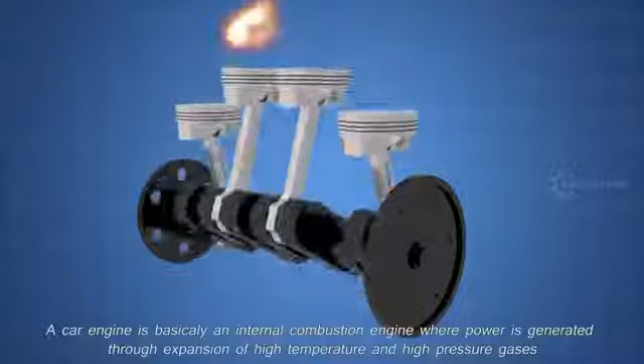Let's see how a car engine cooling system works. A car engine is basically an internal combustion engine where power is generated through expansion of high temperature and high pressure gases. A lot of heat is generated due to the combustion gas and the friction of mechanical parts. For sustained operation, this excess heat should be removed from the engine and kept at operating temperature.

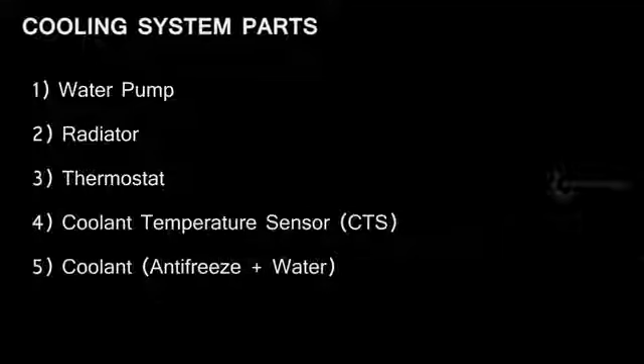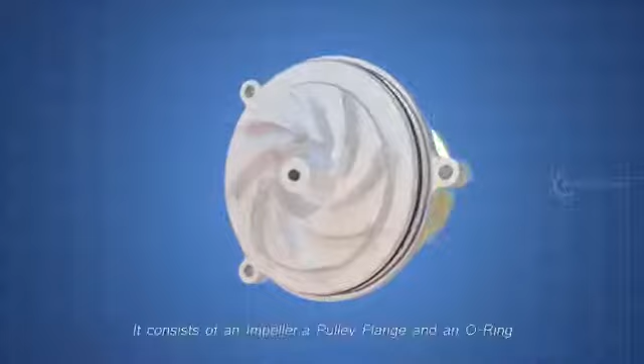Now let's see the parts involved in cooling the engine. The main parts for cooling the engine are water pump, radiator, thermostat, coolant temperature sensor, and coolant. First, the water pump. Water pump is the heart of the cooling system, which pumps the coolant. It consists of an impeller, a pulley flange, and an O-ring. The impeller is driven by the engine drive belt through a pulley.

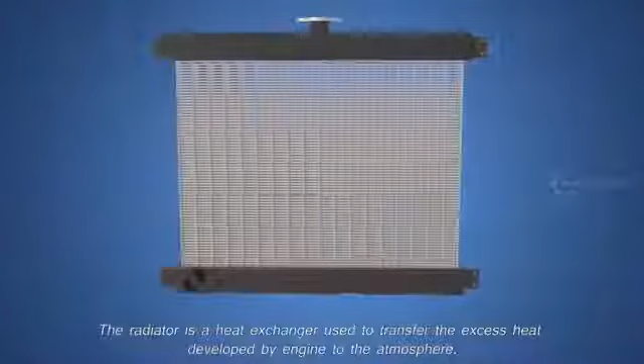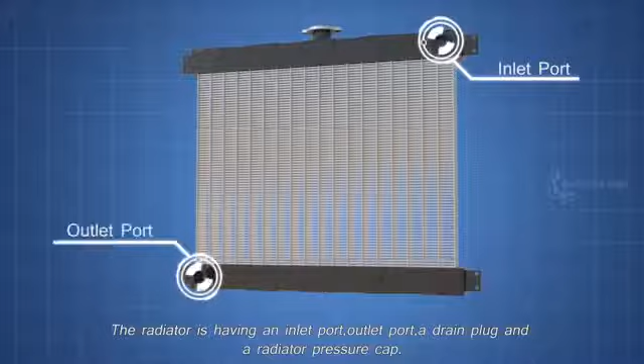Next, the radiator. The radiator is a heat exchanger used to transfer the excess heat developed by the engine to the atmosphere. The radiator has an inlet port, outlet port, a drain plug, and a radiator pressure cap. The radiator pressure cap plays a vital role in the cooling system, which will be explained later.

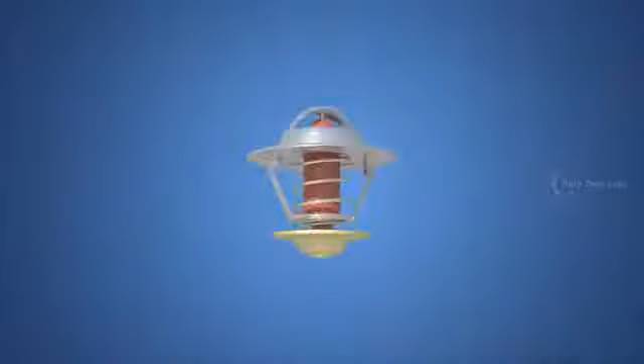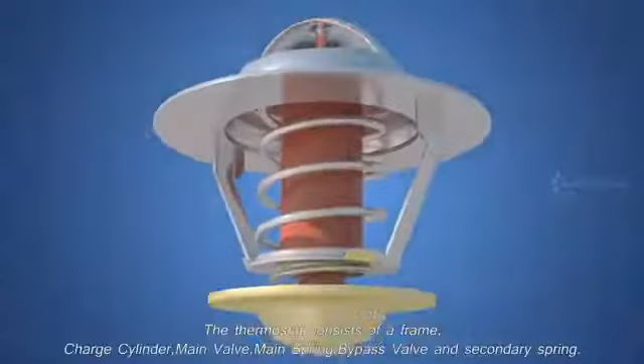Next, the thermostat. The thermostat is a valve which regulates the flow of the coolant and helps to maintain the proper operating temperature for the engine. The thermostat consists of a frame, charge cylinder, main valve, main spring, bypass valve, and secondary spring.

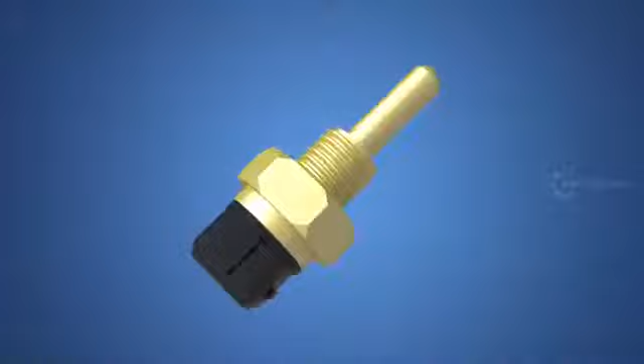Next, the coolant temperature sensor. The coolant temperature sensor is used to monitor the engine temperature. The ECU will use this data to manage fuel injection and ignition time. Some engines have more than one coolant temperature sensor. The data is also used to control the radiator fan and to update the temperature gauge on the driver console.

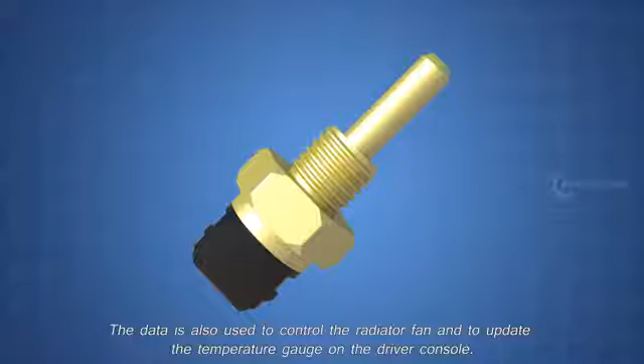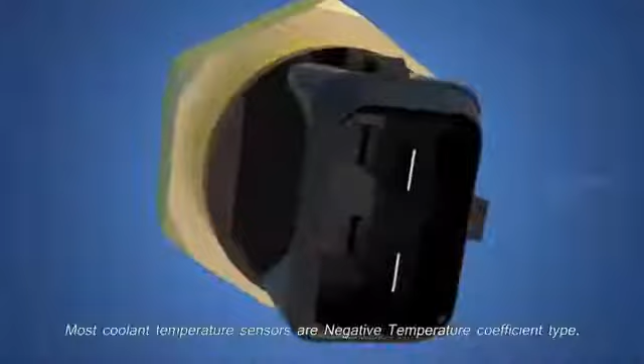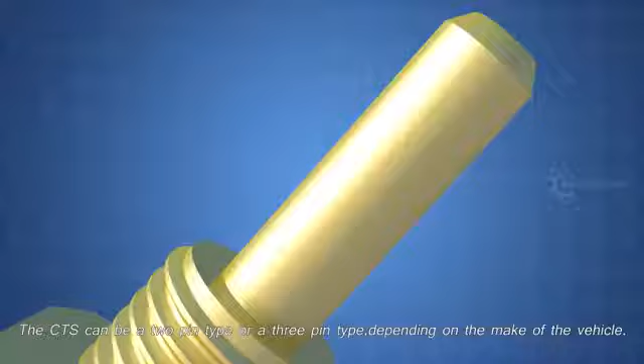The coolant temperature sensor consists of a sensing probe and an electrical connector. Most coolant temperature sensors are negative temperature coefficient type, which means as the temperature increases, the resistance will decrease. The CTS can be a 2-pin type or a 3-pin type, depending on the make of the vehicle. These are the main parts involved in an engine cooling system.

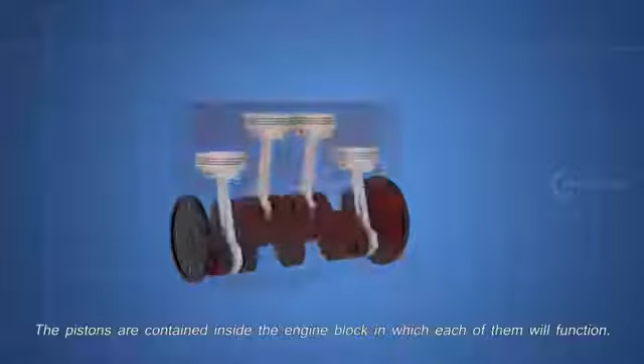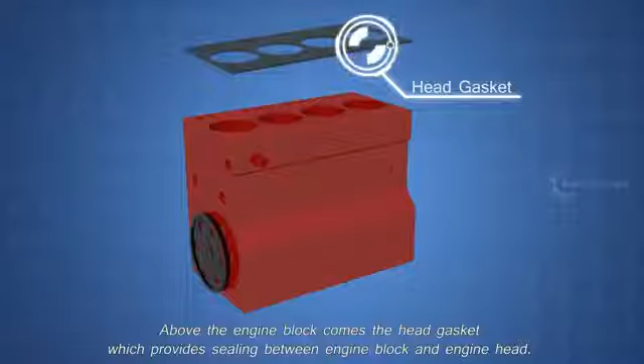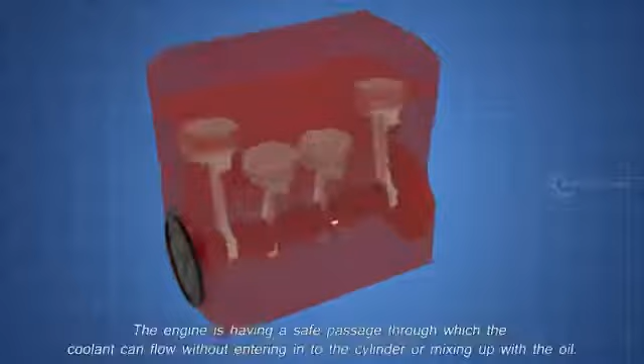Now, let's see how these parts work together. The pistons are contained inside the engine block, in which each of them will function. Above the engine block comes the head gasket, which provides sealing between engine block and engine head. It avoids compression leaks and oil or coolant leaks into the cylinders. Above that comes the engine head. The engine has a safe passage through which the coolant can flow without entering into the cylinder or mixing up with the oil. This passage is known as the water jacket.

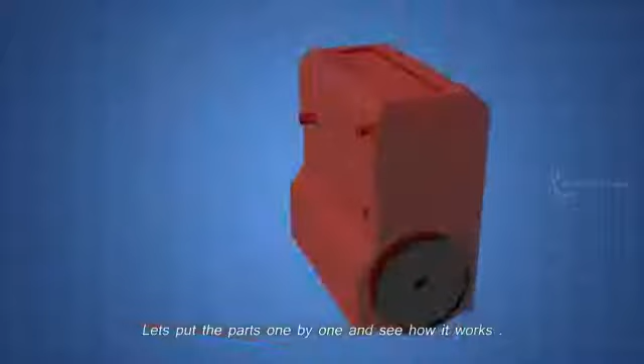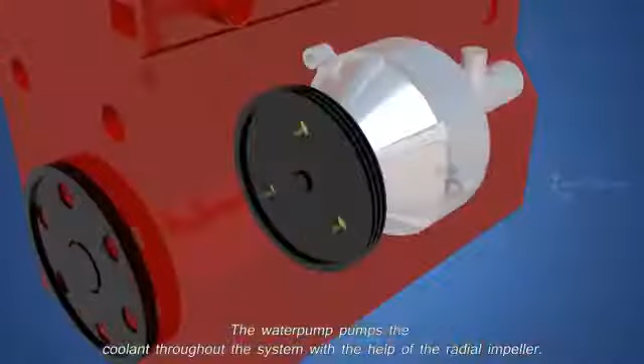Let's put the parts one by one and see how it works. The water pump pumps the coolant throughout the system with the help of the radial impeller. It is driven by the engine itself, using a serpentine belt. The serpentine belt also drives the power steering pump, alternator, and AC compressor. But for now only the water pump is shown.

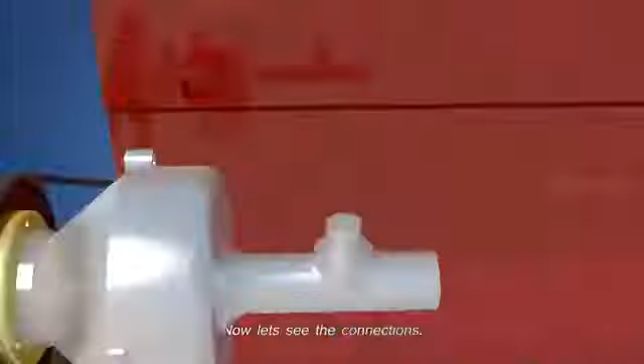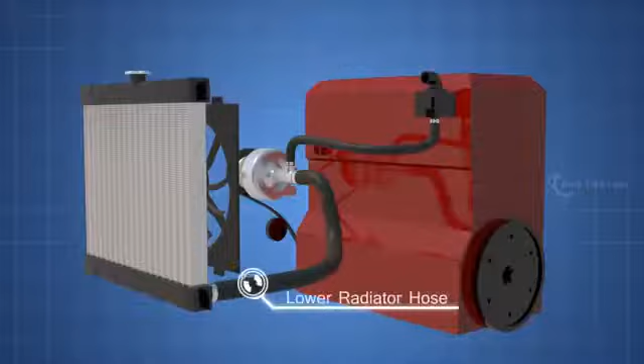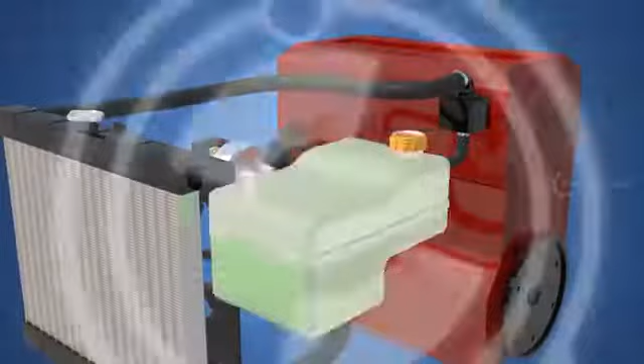Now let's see the connections. The thermostat bypass hose. The thermostat housing. Inside the thermostat. The radiator, and the radiator fan. The lower radiator hose. The water pump outlet hose. The upper radiator hose. The coolant expansion tank. The expansion bleed hose. Coolant overflow hose. So, finally, let's get into the working, starting with the thermostat.

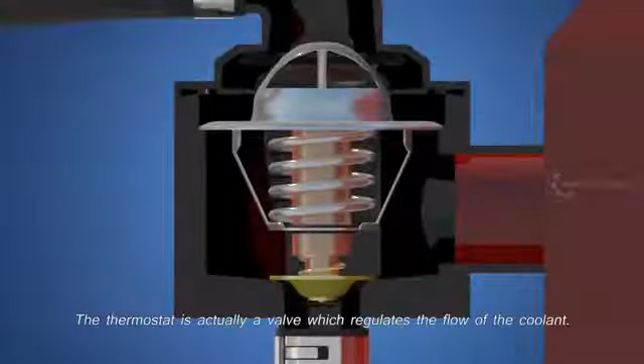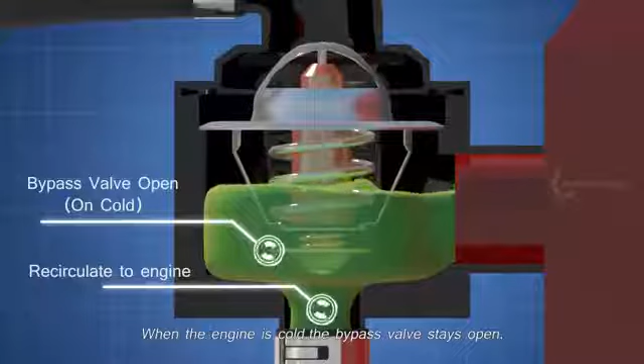The thermostat is actually a valve, which regulates the flow of the coolant. It will always be covered in the coolant, so that the temperature can be sensed. Let's start the operation from a cold engine. When the engine is cold, the bypass valve stays open. So, the coolant bypasses the radiator and recirculates through the engine. This helps the engine to heat up to operating temperature quickly.

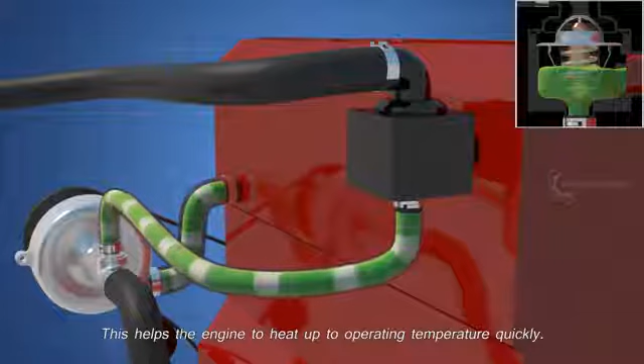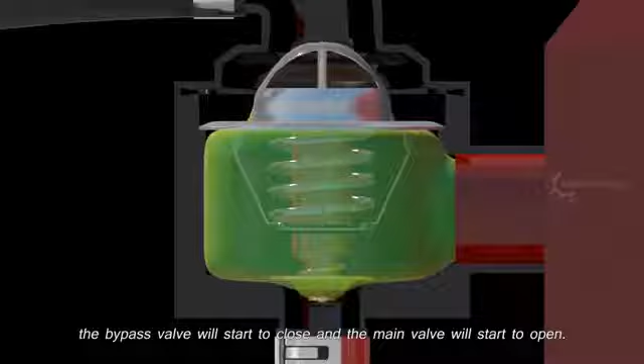Eventually, the coolant temperature increases by absorbing the heat from the engine. Once the coolant starts to reach higher temperature, which is usually between 160 to 190 Fahrenheit, the bypass valve will start to close, and the main valve will start to open. This allows the cold coolant from the radiator to flow to the engine side, and the hot coolant from the engine side to flow to the radiator. In most cars, the coolant temperature sensor is located near the thermostat housing.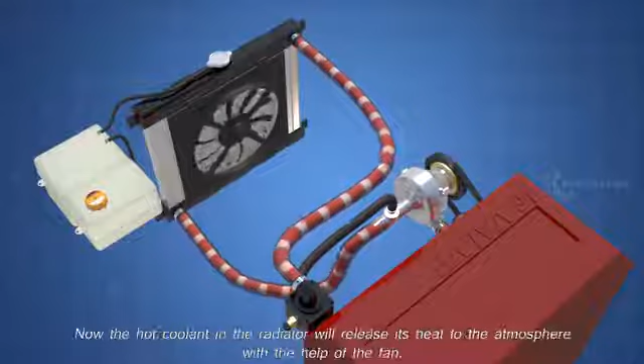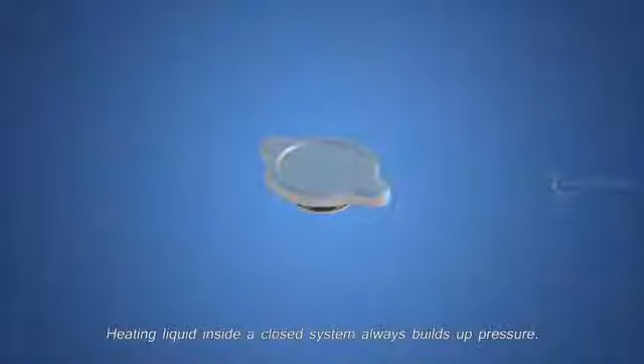It will turn on the radiator fan if the coolant to the radiator side is at high temperature. Now, the hot coolant in the radiator will release its heat to the atmosphere with the help of the fan. At the same time, the cold coolant received from the radiator will start to absorb the heat from the engine for the next cycle. Heating liquid inside a closed system always builds up pressure. So, how to maintain the pressure?

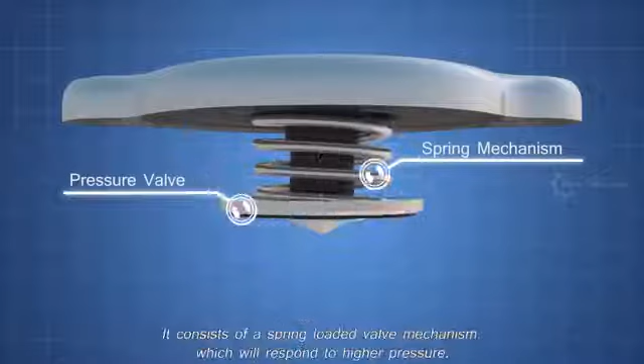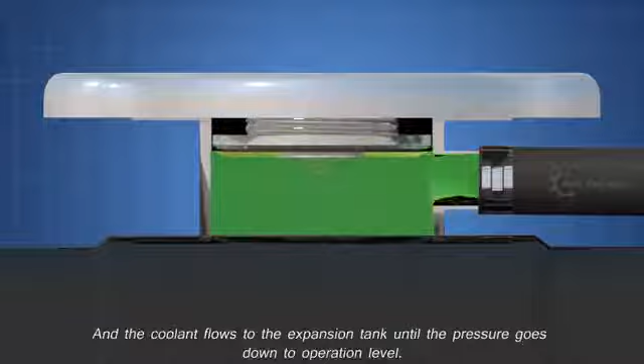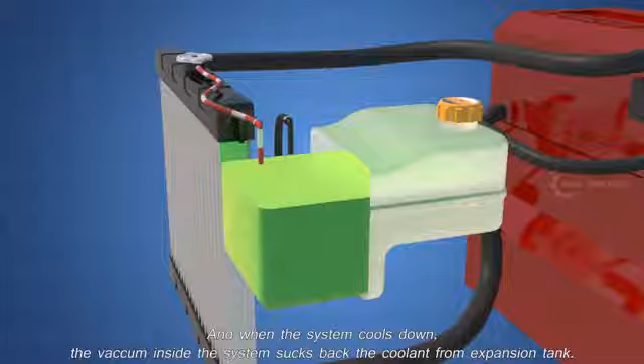Here comes the role of the radiator pressure cap. It consists of a spring-loaded valve mechanism, which will respond to higher pressure. Reaching a pressure above 15 psi will push the pressure cap valve, and the coolant flows to the expansion tank until the pressure goes down to operation level. And when the system cools down, the vacuum inside the system sucks back the coolant from the expansion tank. In case there is too much pressure build-up in the system, due to trapped air or other failures, the coolant in the expansion tank will be pushed out through the overflow hose.

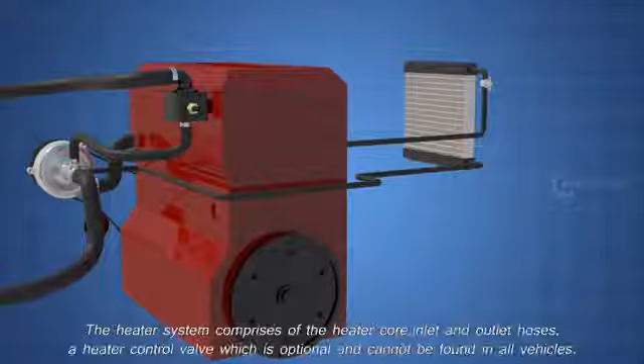The car heater system is a part of the engine cooling system. The heater system comprises the heater core, inlet and outlet hoses, and a heater control valve, which is optional and cannot be found in all vehicles. The heater core acts as a radiator, dissipating heat from the hot coolant to the vehicle interior, using a blower.